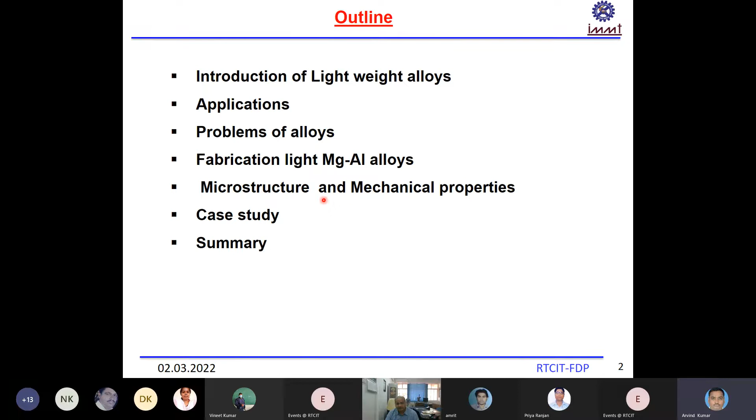So now coming to the introduction part. Because I'm going to talk on light alloys, I'll first introduce what metals are, because an alloy is part of metals. Metals are substances characterized by properties like electrical and thermal conductivity, reflectivity, ductility, and malleability. These are the properties which differentiate metals from non-metals.

Compared to a non-metal, a metal is much stronger, and it is malleable. It has a luster, it has a shine, so you can clearly differentiate metals from non-metals.

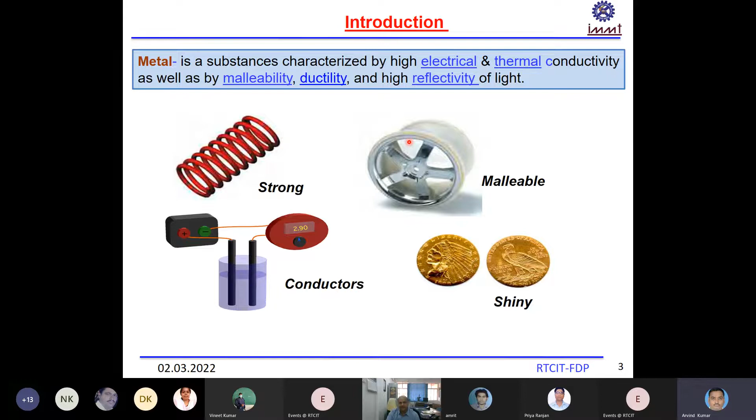And then coming to alloys. An alloy is actually a mixture of two or more elements, and one of those elements should be a metal. Here is an example of copper and zinc. If you see, the copper is replaced by the zinc atoms, so it is forming a solid solution of copper and zinc, and you get this copper-zinc alloy.

And this copper-zinc alloy has a different color depending on the concentration of the zinc. You can vary the colors of the copper-zinc alloys. This is actually called brass, and in Hindi it is called pital. So the color of the brass varies with the composition of the zinc, and the property also varies with this composition, how much percentage of zinc you are adding to the copper.

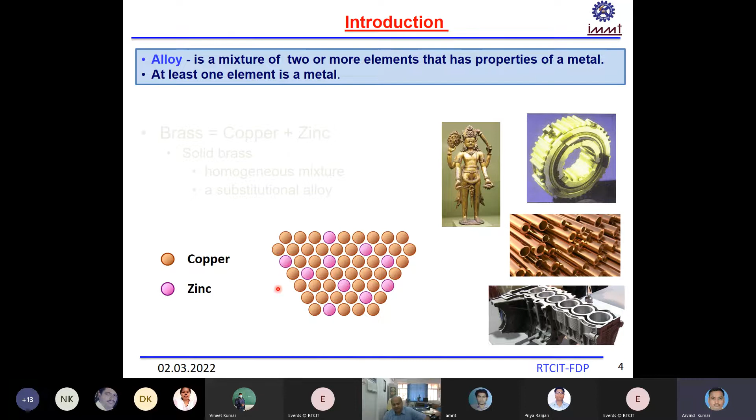So why is it required to make an alloy by adding different elements into another metal? Because for some critical or demanding applications, you cannot get the required property from a single metal. That time you have to think how you can get the required property. So in that sense, alloying is very important, and by alloying, in most cases, you can get the required property.

Suppose you want to make a high strength material with very high design strength for different engineering applications. In that case, with a single metal like iron, copper or zinc, you will not get sufficient strength. So you choose particular elements which can be added in a particular composition, with fabrication methods, processing methods and post-treatment methods, so that you get the final strength as per the design requirement for a particular application.

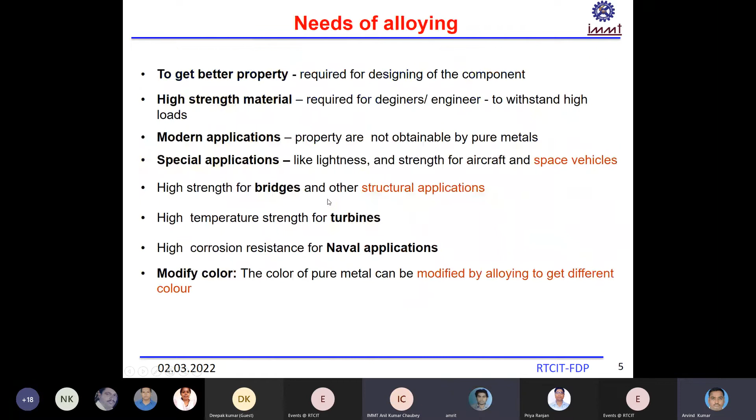Hello. Hello. Yes, sir, you are audible, sir. But is the slide changing? Yes, sir, needs of alloying. The present slide is needs of alloying. Yes, but I'm changing to the next one, but it is not changing. That's why I thought the connection was disturbed. Let me just go to the previous slide. It's also not changing. I think... Now it's changing, sir. Okay. Yes, sir. So now I'm on slide number 6.

This is the role of the alloying element. So what are the roles of alloying elements in getting the required property? If you are adding an alloying element to a pure metal, you can choose it according to your criteria or requirement. And it depends on certain rules like the Hume-Rothery rules, which tell which particular element can be added, what the composition should be, and what the size of the particular metal should be.

So when the atomic sizes are quite similar, one atom is replaced by the other metal atom. In that case, you get a substitutional solid solution, and the lattice position is occupied by the alloying element. Because there is some difference in atomic size, the lattice position is distorted, creating lattice distortion, and that's why the mechanical strength is increased.

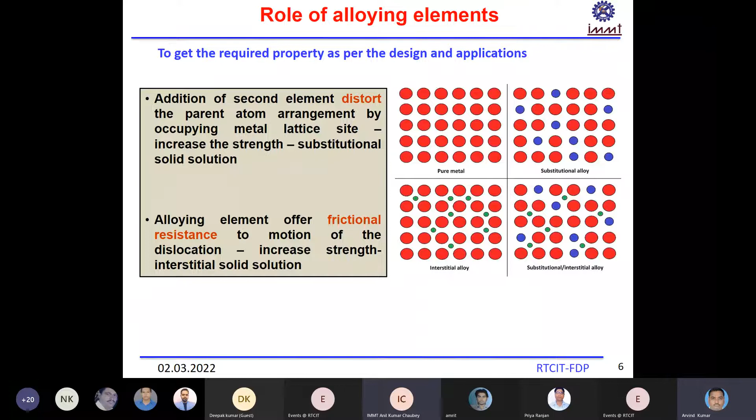So our topic actually is lightweight materials. So why is lightweight required? Because in the case of the automobile, you are decreasing the weight when you are using lightweight material for the construction of the vehicles.

At the same time, in many applications, when your material, utensil or any article is lighter, it looks handy and you can carry it anywhere. And in the case of the automobile, where fuel consumption, safety features and performance are very critical parameters, different reported studies show that when you decrease the weight of the vehicle by around 100 kilograms, for 100 kilometers of running of the vehicle you can reduce the fuel consumption by 0.5 liters.

So in this case, when you are reducing the fuel consumption with effective burning of the fuel, you are increasing the efficiency of the vehicle, and at the same time you are reducing the cost of running the vehicle. So this is very much helpful in the case of the vehicle.

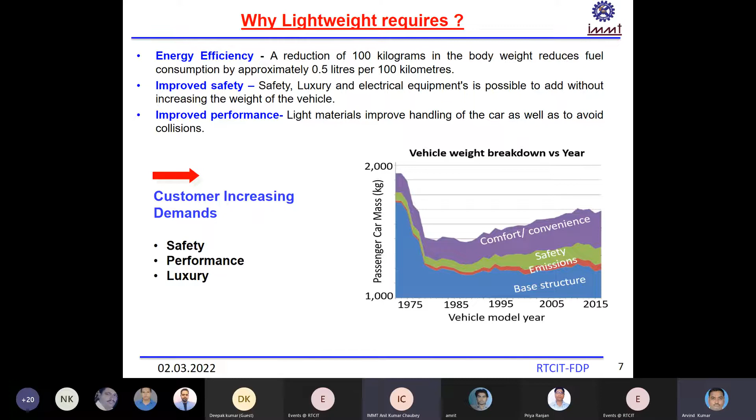And in aerospace, what are the requirements for lightweight? In aerospace, weight is a very critical part, because the aircraft has to fly. So the minimum weight it carries will be good for improving the efficiency of the engine, as well as accommodating extra passenger weight.

So the main requirement is that the components should be very light and very durable, because the aircraft runs at low temperatures, atmospheric temperature, sometimes a little higher temperature, and in different atmospheres, sometimes a marine atmosphere over the sea, sometimes the normal atmosphere. So the material should be very durable and highly corrosion resistant, so that it can sustain all the atmospheres.

And it should have a high tolerance limit and high fatigue resistance, because it is going to be used in continuous operation, and damage tolerance should be very high. Otherwise, the aircraft cannot sustain, and any small fault cannot be tolerated in the case of aerospace material.

So here is a very critical requirement of the property, and at the same time it should also be a cost effective solution, so that many companies can attract and replace it by lightweight material. Balance of the property is also very much required, because for a critical application, all the properties required for aircraft and space applications are very critical. So all the properties should be in balanced form.

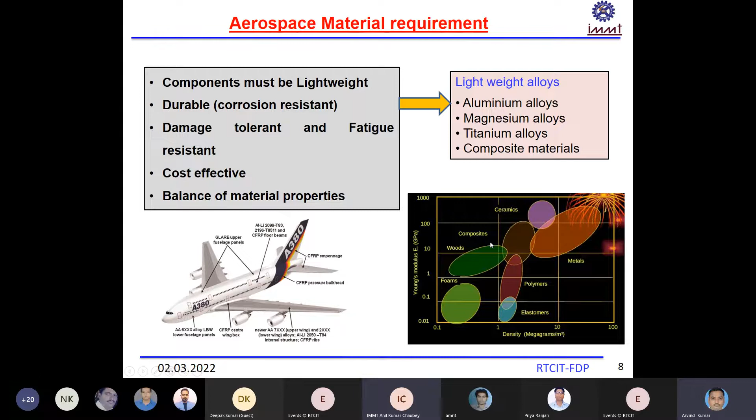And if you are replacing parts with magnesium alloys, since magnesium is lighter than aluminium, it is two-thirds of the weight of aluminium alloys, so you can reduce around 37 to 38% of the weight of the vehicle. Composite materials can replace similar weight as well. So composite and magnesium alloys give almost similar weight performance, because density-wise magnesium is very low, around 1.6, which is comparable to composite materials.

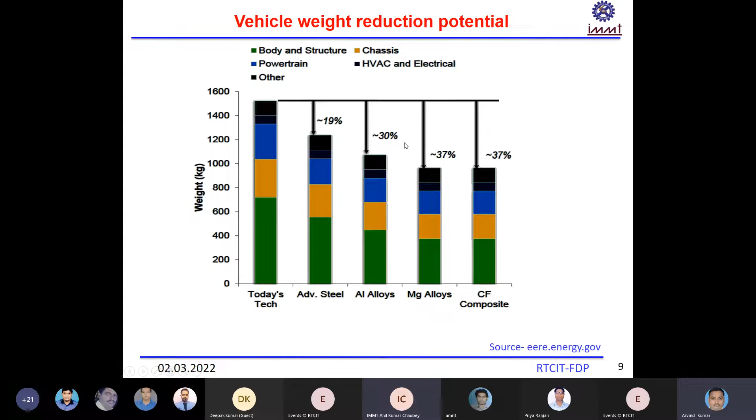Now coming to the general magnesium aluminium alloys, what are the applications of magnesium aluminium alloys in different fields? Because magnesium aluminium has low density and high strength, it gives a high specific strength material, and it is also a good castable alloy. Magnesium is also biocompatible, so it can be used for biomedical applications as well.

Many applications of these alloys are in transport: steering wheels, framework, powertrain, gear housing box, engine block castings, and this is the biomedical application where biomedical implants can be made with magnesium alloys. Also aerospace applications and electronics applications, because of the lightweight of magnesium, many electronics components require being handy as one criteria, so many electronics components were replaced by magnesium alloys.

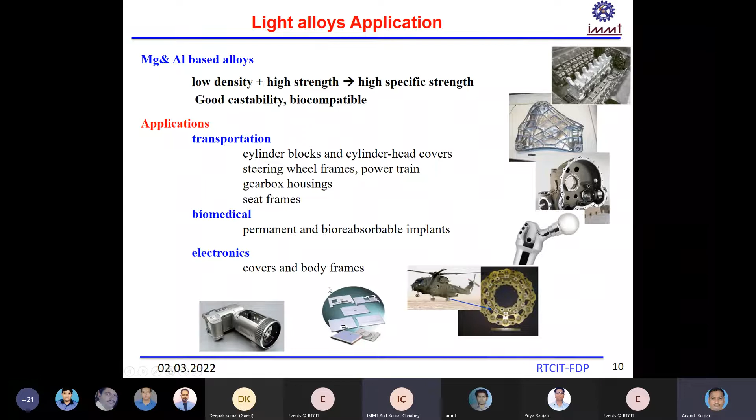Apart from this, these lightweight alloys, aluminium-magnesium based alloys, are used for missiles and other applications like photo engraving, as deoxidizers and desulfurizers, and as anodes since magnesium alloys are highly corrosive. They are also used in sports goods equipment, where large, lightweight components are made from them.

Magnesium is biocompatible, so many bio-implants and implant accessories are made from magnesium-based alloys, such as screws, stents, and nerve guides. Since these are biomedical applications and the material is biocompatible, only the degradation rate of the magnesium alloys needs to be checked. Much research is ongoing in this area of biomedical applications.

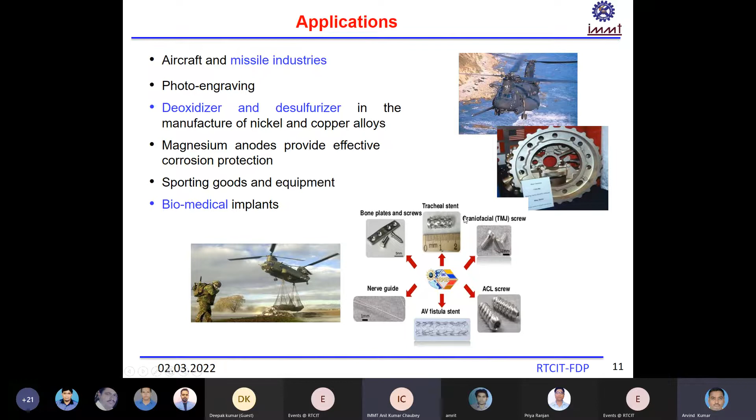Now coming to the different fabrication methods of these alloys. The lightweight alloy is mostly made by the casting process, because casting is economical and large volume production can be achieved by this method.

Many casting methods like sand casting, die casting, and permanent mold casting are used for these lightweight alloys, along with stir casting and bottom pouring. Where your alloys are not completely miscible, you can stir and then use the bottom pouring casting method.

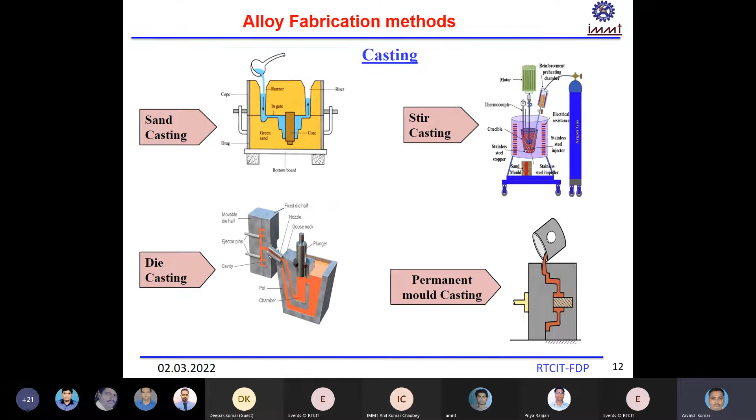Apart from casting, powder metallurgy processes are also used to make alloys, especially for some immiscible alloys and heavy metals which are not completely miscible with each other. That's why many alloys are made by the powder metallurgy method.

In powder metallurgy, you can extend the solid solubility by mechanical alloying, so that a larger volume fraction of the alloying element can be added.

Some processes like spark plasma sintering involve creating a spark between two electrodes, with the material placed between them, to get the sample sintered. Simultaneously, pressure is applied to achieve high densification in the component.

After that, this material can be extruded to remove further porosity.

Other additive manufacturing methods include 3D printing, where you can get a near-net shape by using powder alloys to produce different components through this near-net-shape additive manufacturing process.

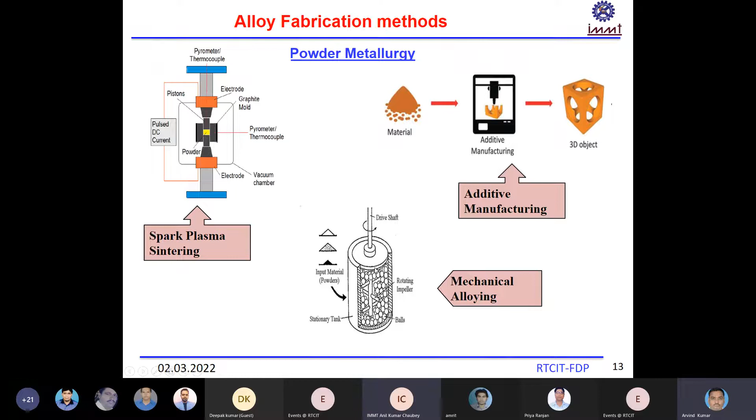Mechanical alloying is also one of the powder metallurgy routes, where different powders are mechanically alloyed. This process can increase the solid solubility limit, and then through sintering or extrusion, the component is made by this mechanical alloying powder metallurgy route.

Now coming to the selection criteria for these alloys. For selecting or making the alloys, the phase diagram is one of the most important tools, where you can determine how much percentage of element A or B can be added to the parent metal.

The phase diagram shows what the phases should be at different percentages, temperatures, and pressures, giving a guideline for making the alloy. It also allows you to control the structure and properties of your alloy, as the phase diagram depends on composition and temperature of the different alloying elements.

Here you can see that A and B are alloyed, and in this range you can see the solidus and liquidus range, with the liquid and solid region in between.

For example, suppose this is a copper-nickel binary alloy. If you add nickel to copper, you get the alpha copper solid solution, and this is the liquidus range. When pure copper is present and you add nickel, the liquidus range shifts to a higher temperature.

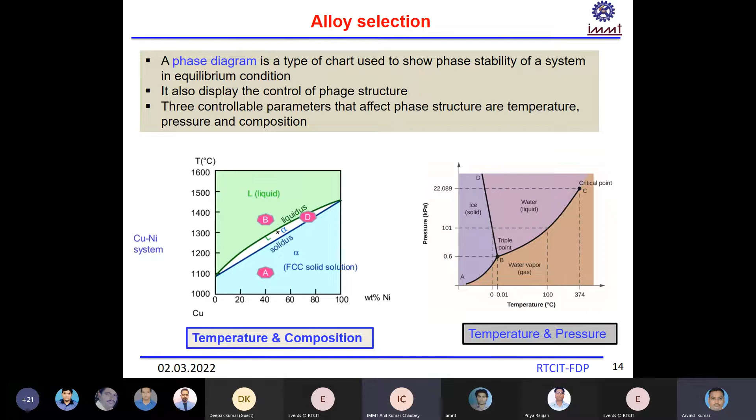This is just a guideline to see what phases you get at what temperature, and at room temperature, how much phase percentage or volume fraction you get after solidification of the alloy.

The lever rule is also one of the tools where you can get the exact volume fraction of the phases, and in certain phases how much of element A or B is present. You can get this using the lever rule.

This is one of the alloy phase diagrams, where A and B are present. A is 100% here and B is 100% there. This is the eutectic point, and suppose if you want to get the composition at this point, this is the W1 composition.

By the W1 composition, you can apply the lever rule, where you draw a line parallel to the x-axis at that point, and drop a line to the x-axis also, so that you can get W0. By applying this lever rule, you can get the particular composition at that particular point and particular phase. So according to your requirement, you can choose how much alloying element can be added to get this volume fraction of the phases at different temperature, and also at room temperature. So this is one guideline for how to make the alloys.

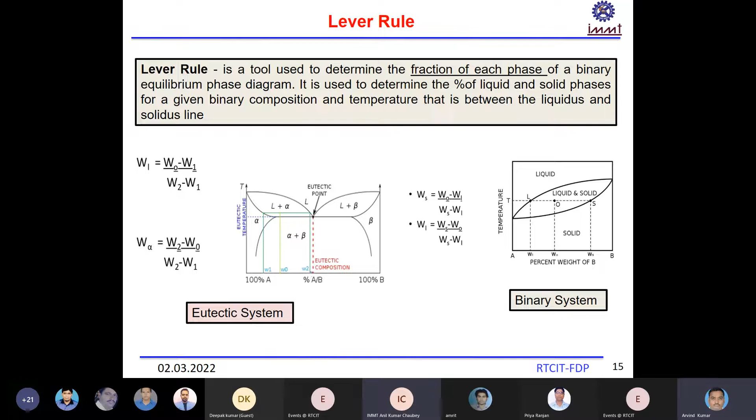In physical metallurgy, many such rules exist, many guidelines which help you find out the designing of the alloy. Here I have given just a small introduction.

So what are the automobile solutions for lightweighting of the vehicle? In lightweighting, first you have to choose a lightweight alloy, so that you can replace the components by using the lightweight alloy. Then you have to see the design parameters of the component, and how you can modify the design for lightweight components. Then you also have to see what technologies are available, and how you can modify the technology to get this design for lightweight casting or using lightweight material. So sometimes you have to see the design and also the different fabrication parameters, and then what technologies are available for fabrication of these lightweight alloys.

So all these you have to see for different cases, if you are choosing aluminum alloys or magnesium alloys. You have to see first how you are going to make the alloy, and then if a certain design parameter is there, how you are going to get that design of the component, and then what technology you have to choose, so that you can get a particular design without any defects or compromising the property of the material. So these parameters you have to see for designing different alloys.

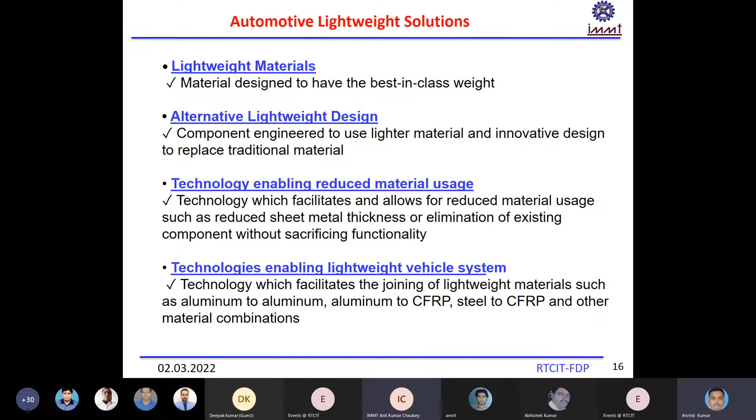So after that, I'm coming to the case study part. In the case study, I'm going to give a case study of the magnesium aluminum lightweight alloy. First I'm going to give a synthesis and this alloy fabrication process by the powder metallurgy route, and then I will explain why powder metallurgy was used in this process, and how we can overcome the disadvantages of liquid metallurgy by using this powder metallurgy route, and what are the limitations of the powder metallurgy route. Then I will also show another case study of this same alloy fabrication by the casting route.

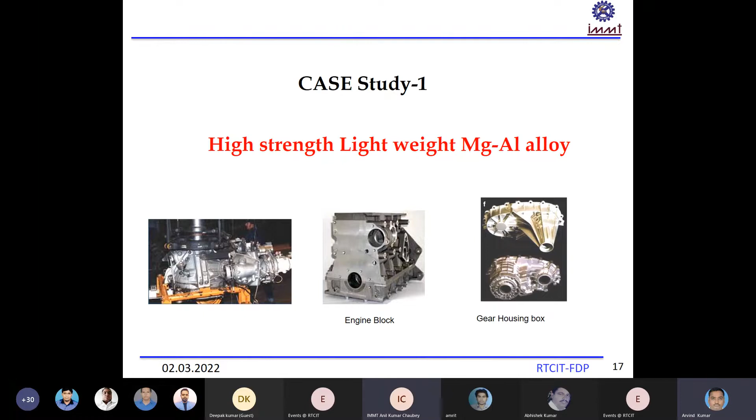So first I'm going to give this powder metallurgy route. So what are actually the problems in magnesium aluminum alloys? Because if you look at the phase diagram of magnesium aluminum, the solid solubility of aluminum in magnesium is less than 1% at room temperature.

So what happens is, when you go to a certain melting temperature and add aluminum to magnesium, and then solidify down to room temperature, you come to a two-phase region, with the alpha and gamma phases. Gamma is actually the magnesium-17-aluminum phase, which is a brittle phase. This phase has a semi-coherent BCC cubic structure, which is incoherent with the magnesium matrix, which has an HCP structure.

But anyhow, you are getting this phase, so we have to avoid this phase and minimize it. Otherwise, our material will become completely brittle, and the interface between magnesium and this gamma phase is also very fragile. That's why, when used in real conditions, many cracks form when the gamma phase is much more present in this alloy. So our aim is actually to reduce this gamma phase in magnesium aluminum.

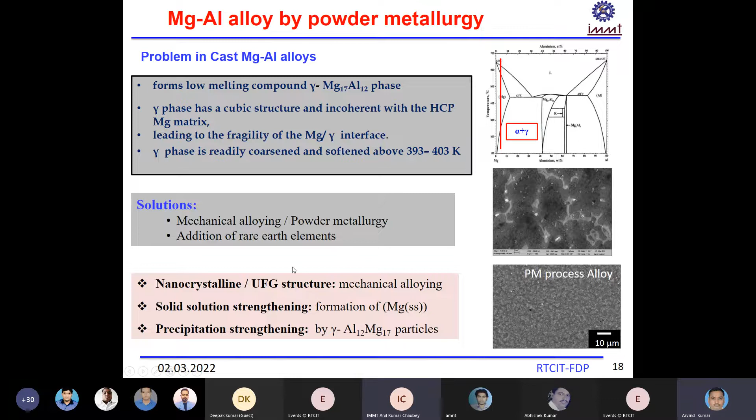So I'm going to tell you how this alloy was prepared. We have added 7.4% aluminum in magnesium, and by the powder metallurgy route we did mechanical alloying by planetary ball mill, and then this powder was hot pressed and then hot extruded. After the pressing, you get this tablet form, and this tablet was used for extrusion, and you get the rod form, and then the final property of this alloy was evaluated.

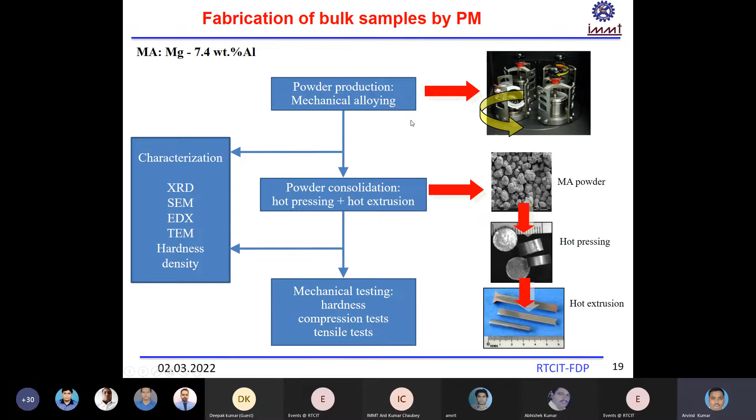So these are the parameters used. This is the hot press, and this is the die where the powder was filled, and then it is heated and pressed, and after that you get the pellet, this cylindrical tablet, and then this was extruded at 400 degrees temperature. The 10 mm diameter was reduced to 4 mm diameter after the extrusion, so that you get a very highly dense final component.

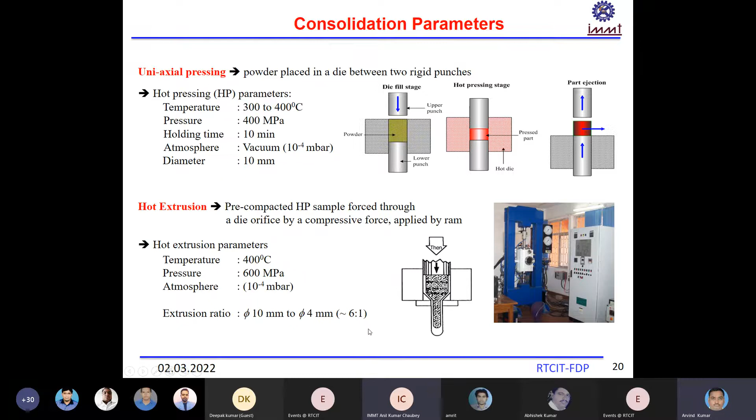So what we have done is extend the solid solubility of aluminium in magnesium, so that you can reduce the gamma phase formation. This mechanical alloying was done for 5 hours, 20 or 40. We have gone to 100 hours, and we see that there is still a small gamma phase here, and then it was again done with 3 hours of cryomilling to make the particle size very small.

But in this process there is a lot of handling. The handling was mostly done in the glove box, but during the processing of the extrusion or compaction there is some contact with the atmosphere, and magnesium is highly oxidizable. Some oxidation is taking place, but these oxides are also very fine and distributed throughout the matrix.

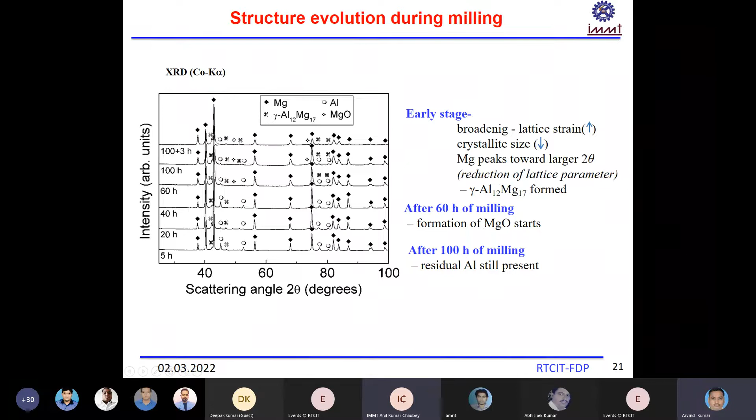Here you can see the small gamma phase and the solid solubility, because the aluminium peaks are broadening, so aluminium is going inside the magnesium. And I'm showing here how the particle size reduction takes place during the mechanical alloying. Initially, because it is a ductile material, the particle size increases, and further on fracturing becomes dominant compared to cold welding.

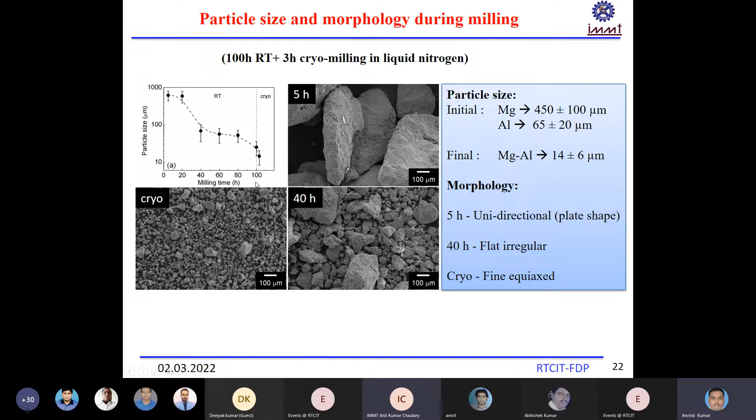Why? Because it is a very ductile material. That's why cryomilling is required to get very fine particles in the case of magnesium aluminum alloys. Here I am going to show you the elemental distribution during the mechanical alloying.

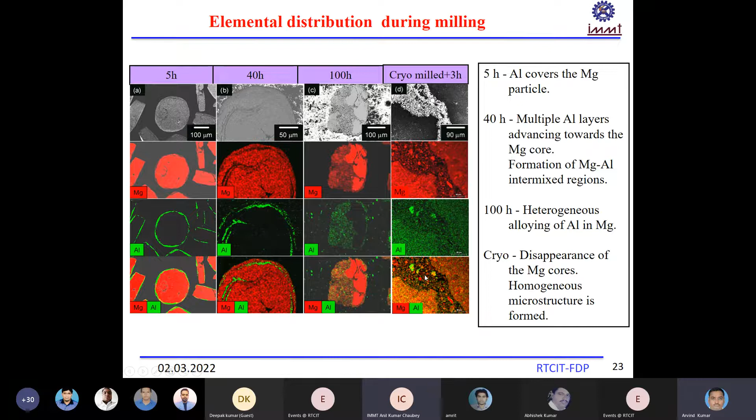So here by mechanical alloying, we were able to get more and more aluminium in solid solution, as well as reducing the size of the gamma phase, as well as distributing it throughout the matrix. So our aim was that the gamma phase should not solidify along the grain boundary, and also to reduce the gamma phase. So by this powder metallurgy, this objective was achieved.

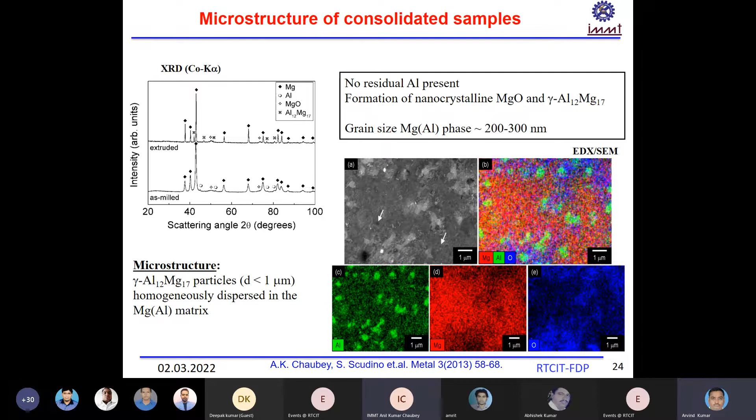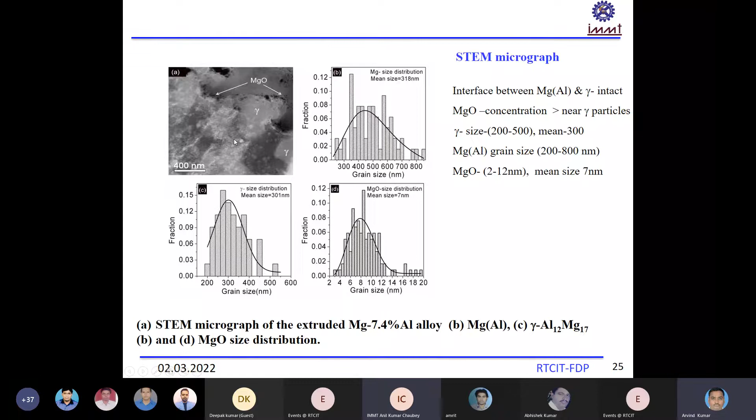In the next slide, this is the STEM microstructure, where you can see a little bit of magnesium oxide, which is very fine, 5 to 7 nanometers, and distributed mostly along the particle interface. And the interface with the gamma phase is also very good. There are no gaps or cracks at the interface. So it shows that this gamma phase forms throughout the matrix, but the interface is also very good.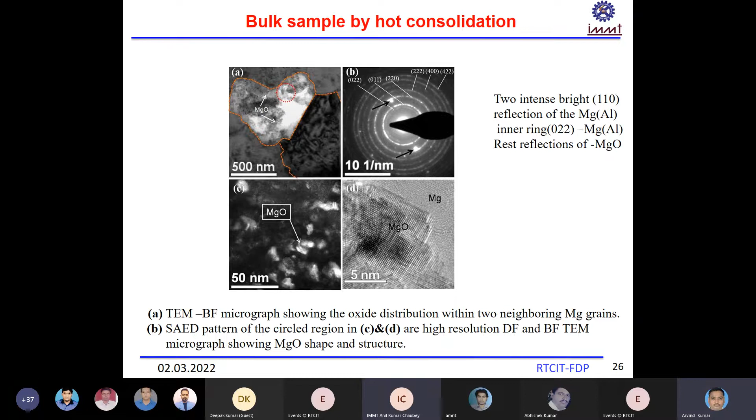This is the MgO distribution. This is the magnesium distribution, and the interface also you can see, and it is a very small size of magnesium oxide. So this is not doing any harm, it's only strengthening the matrix in this case.

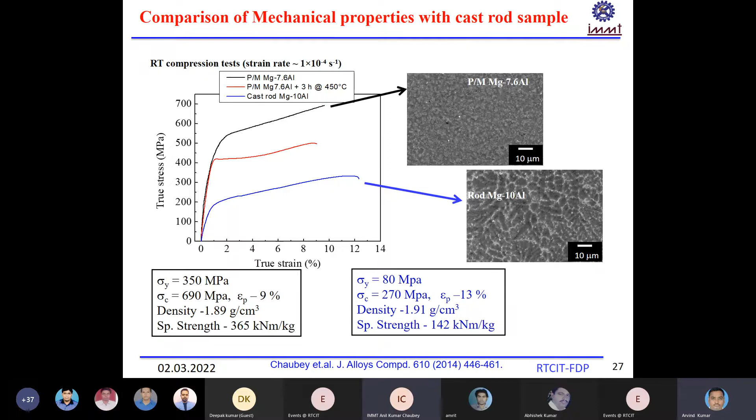And after heat treatment, the mechanical property does not go drastically down. It is around 450 megapascal, still more than twice that of the cast structure. So this shows that if you make this magnesium aluminum alloy by the powder metallurgy method, you can achieve your objective of higher strength without losing ductility.

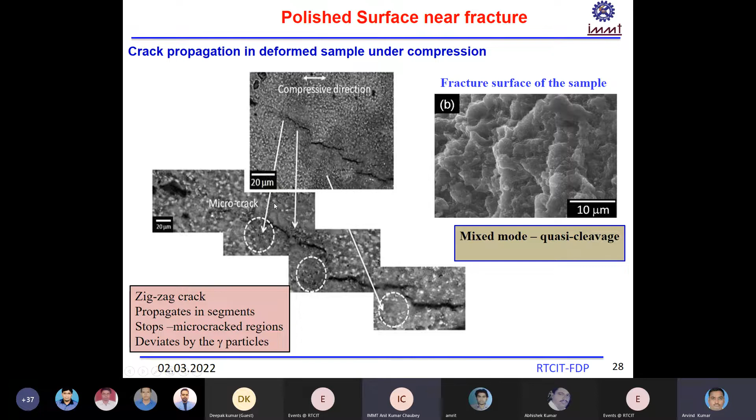So now coming to magnesium case study 2, where we are going to form this magnesium aluminum alloy by casting method. With the powder metallurgy method we are in fact getting higher strength, but making a bigger component and cost economy are other factors. The powder metallurgy method has a limitation in making a component, and cost-wise it is also higher compared to the casting alloys.

So that's why we have to look at another method where we can get the same objective, to reduce the gamma phase and increase the solid solubility or strengthening in the alloys. So we have tried the casting method also.

Hello, Dr. Arvind? Yes, sir. Okay, I thought there was no response, whether we are in connection or out of connection. No, sir, we are listening. Okay, if there is any question, you can ask in between or after the presentation. If you have any query, you can stop me and I can give an explanation. Dear participants, if you have any question or doubts, please put them in between; sir has given permission. Sir, please continue. Okay, thank you.

So I'm going to present this magnesium aluminum alloy production, which is mostly used in automobile and aerospace components, by casting method. Here we first tried magnesium and aluminum. We used the magnesium 5 aluminum alloy and then added some zinc, and then added calcium also to see the possibility of reducing the gamma phase in this alloy. And we produced this by stir casting method.

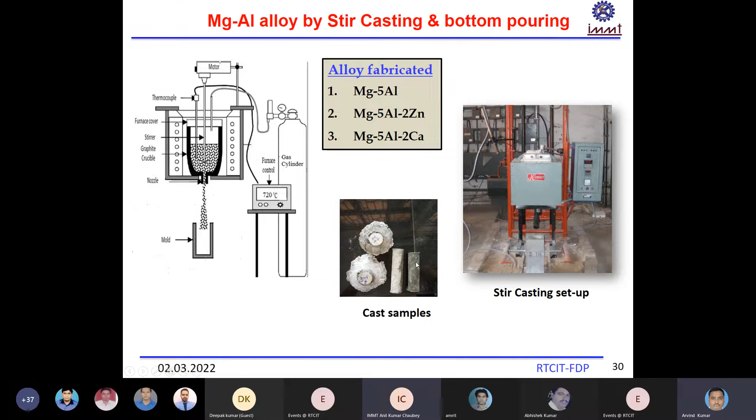So all these three alloys have been made by the same stir casting method, sir? Yes, all these three alloys are made by the same stir casting method. On the right side we are seeing the stir casting setup. This is the actual furnace, and this is the schematic diagram. Yes, I have worked in this. And this is the cast alloy you can see, and after casting, the samples.

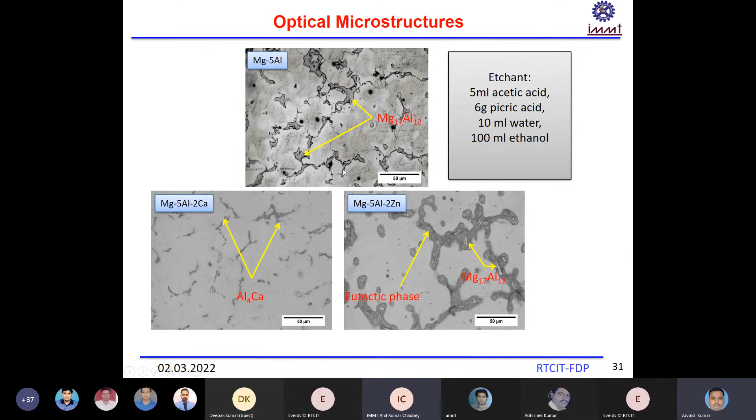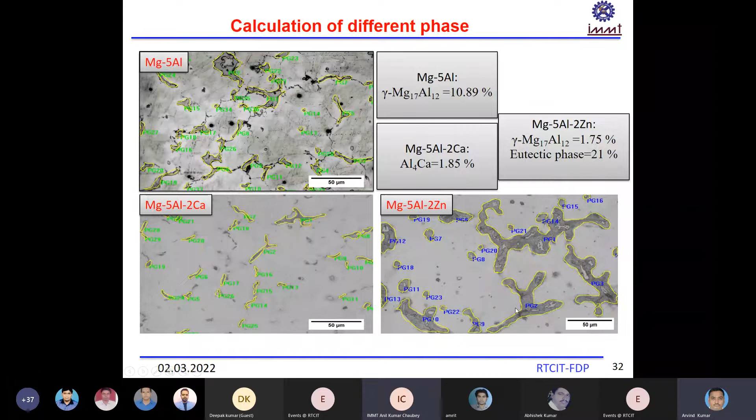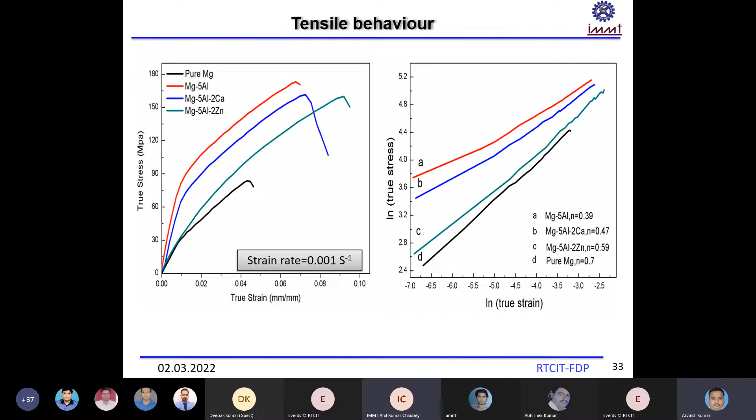For pure magnesium, you are seeing a mix of ductile and brittle type of fracture. But as you add more aluminum, it goes more brittle; this is the intermetallic phase region where it becomes completely brittle, and that's why it fails at a very low ductility. When we add calcium, it is more brittle, and you are not solving any problem.

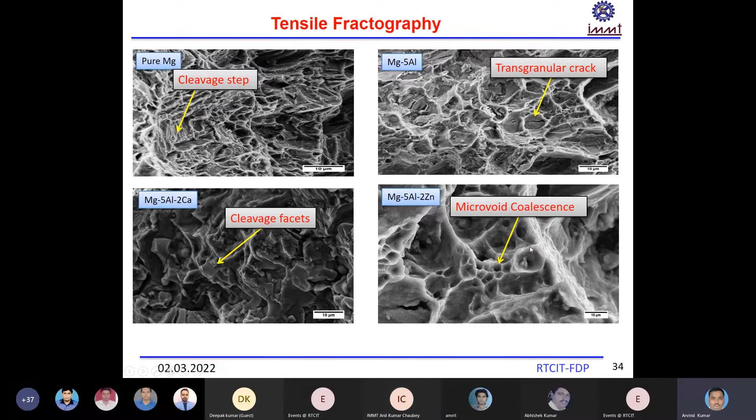But in the case of zinc, the ductile region is increasing, and still there is some brittle region, so it is a mix of ductile and brittle. That's why you get moderate strength and moderate ductility. Our purpose was to reduce the gamma phase and increase the strength, but we could not increase the strength. We can only use zinc to make an alloy with moderate strength and moderate ductility.

Sir, I have one question on the previous one. These three alloys, magnesium aluminum, magnesium aluminum zinc, and magnesium aluminum calcium, these findings were for the primary process? No secondary process like rolling or forging was done? No secondary processing was done, because when the material is brittle, if you go for rolling or forging, the sample will crack and the component cannot sustain. Many cracks will form, so we have not gone for secondary processing.

But in case of magnesium aluminum zinc, secondary processing can be done; that was not done in this case. So by doing that, can we expect any further improvement in the property? Yes, that can be expected in the case of magnesium aluminum zinc. I will show you the effect of forging in later slides. But here our aim was to increase the strength.

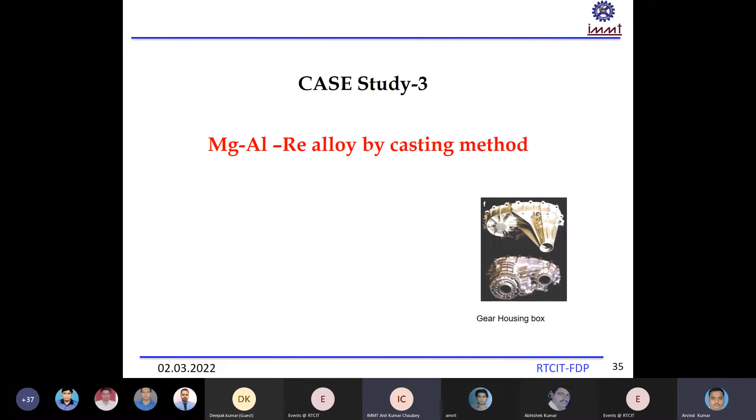But the rare earth element is a very small percentage. Rare earth elements increase the cost of this alloy, but we are using 0.1, 0.2, 0.3 percent, so it does not actually increase the cost much. So here you can see the effect of the rare earth.

Actually, this rare earth element increases nucleation, and that's why it reduces the grain size, and grain refinement takes place during solidification. When the grain is refined, obviously your mechanical strength will be increased, and it also improves your metal quality,

and reduces the impurity level. And the intermetallic which is forming is stable at high temperature. That's why the creep strength of this alloy is also increased, and rare earth also improves the corrosion resistance. So rare earth has a very good effect in magnesium aluminum alloys.

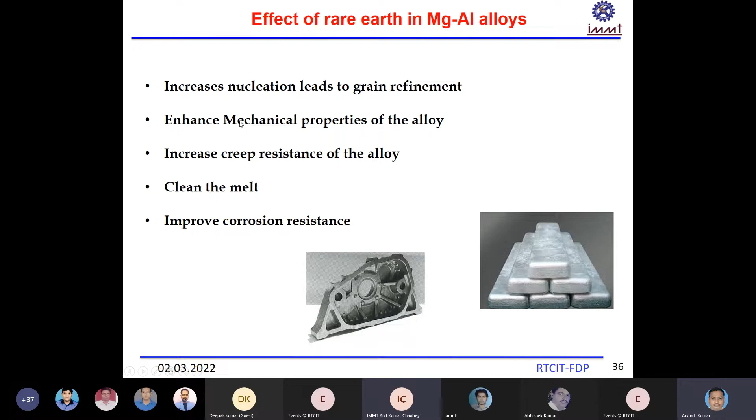So actually, the main problem was the gamma phase compound in magnesium aluminum alloys, and this gamma phase coarsens when you are heating the alloy in the range of 393 to 403 K, and further your property deteriorates. And this gamma phase, which is intermetallic with a cubic structure, is not compatible with the magnesium HCP structure, and the interface becomes fragile.

So to solve these problems, rare earth elements are more reactive to aluminium compared to magnesium. So in magnesium aluminum rare earth, it first forms the intermetallic compound Al11RE3, which is incoherent with the HCP matrix, and its melting point is also high, so it cannot melt during operation at 300 to 400 degrees. That's why it also increases the creep resistance of this alloy.

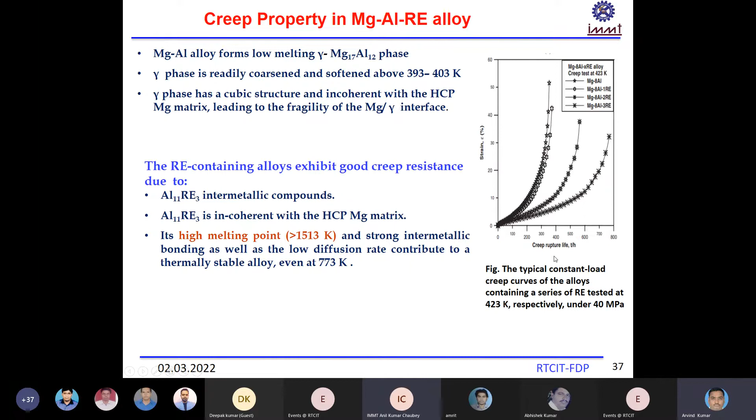How we made this alloy: in this schematic diagram you can see magnesium cerium was added, cerium 1%, 3%, and 5%, to see the effect of cerium. We first took the magnesium cerium master alloy, remelted it and homogenized it for making this master alloy.

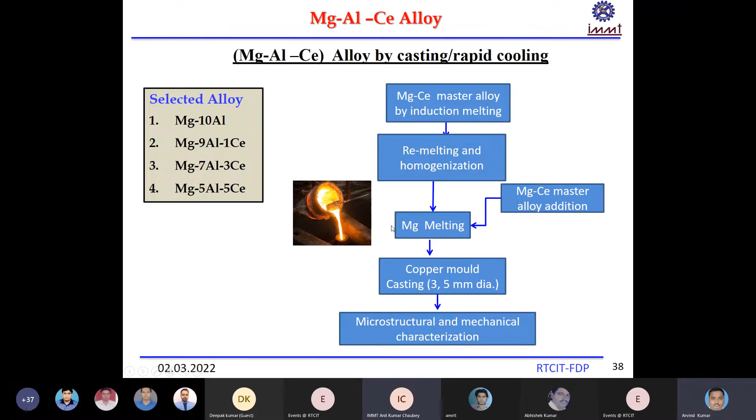Then the magnesium melt was taken, and the master alloy was added according to the composition requirement. Then it was cooled in a copper mold casting, which gives a very high cooling rate so that the grain size is very low. And then we studied the microstructure and mechanical properties of this alloy.

So here you can see the microstructure and the X-ray diagram. In XRD you can see how the different phases are forming: the Mg17Al12 gamma phase, which is there in magnesium aluminum alloys, is reduced at 1%, but at 3% it is completely gone, and at 5% you can see another intermetallic.

At 3% there was an Al2Ce phase, and at 5% Al2Ce and Mg17Ce2 phases are forming. So if you go to a higher cerium percentage, another phase forms, Mg12Ce, Mg17Ce2.

In the microstructure also you can see the magnesium aluminum matrix phase. This bigger polygonal type structure is the Al2Ce phase, and this flaky phase is actually the Mg17Ce2 phase. It is wrongly mentioned here.

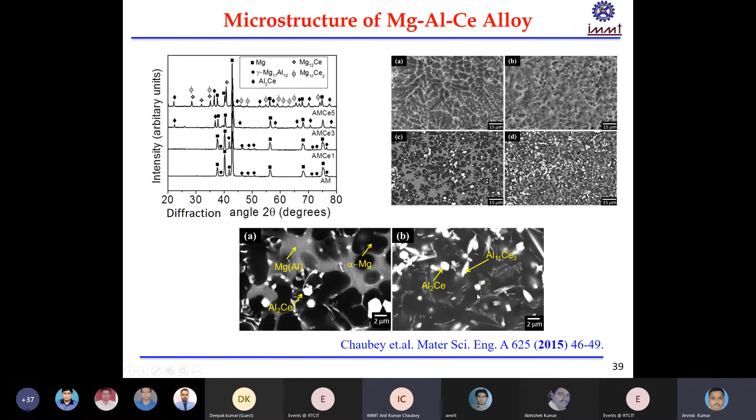So in case of the high percentage of the cerium, you can see the phases distribution in this image, and after that here you can see the mechanical property.

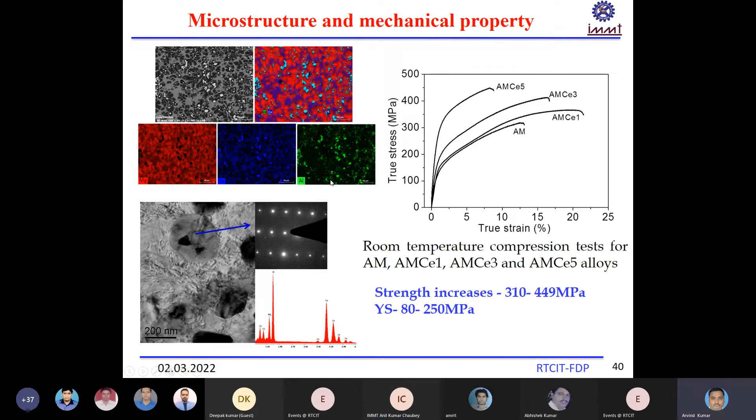So after that, apart from cerium, we have also added neodymium percentage in this magnesium aluminium alloy. A similar method was used here. We first prepared the master alloy, and in the master alloy we added magnesium by melting. We used the stir casting method, and then got the magnesium alloy ingot with neodymium.

Here also you can get different phases, as the rare earth elements are almost similar in nature in different aluminium and magnesium alloys. You can see this is 1Nd. Here it was magnesium 4 aluminium, where this phase was refined.

You can see this gamma phase which is along the grain boundary, but here it is refined, and some are formed within the grains.

But if you increase the neodymium percent to 4%, you can see another intermetallic forming, like a branch structure, polygonal type triangular structures. You can see how it is homogeneously distributed in this magnesium aluminium matrix, and the XRD also shows this phase.

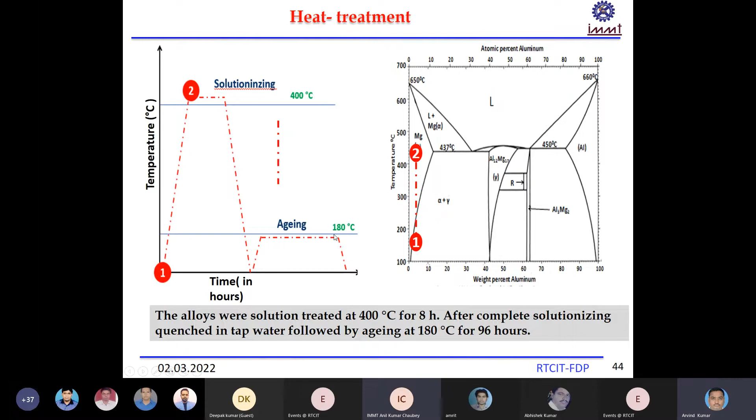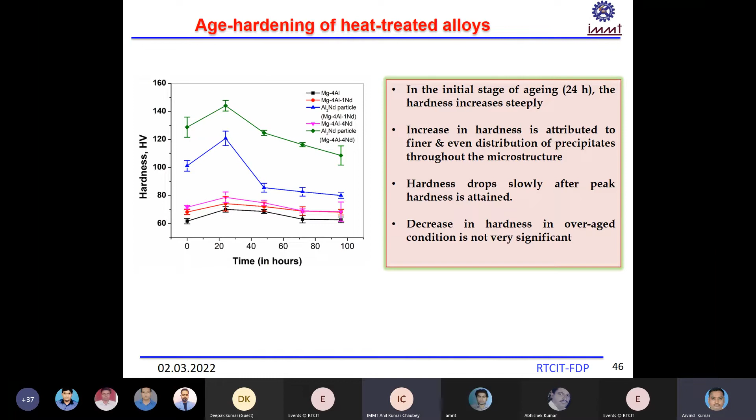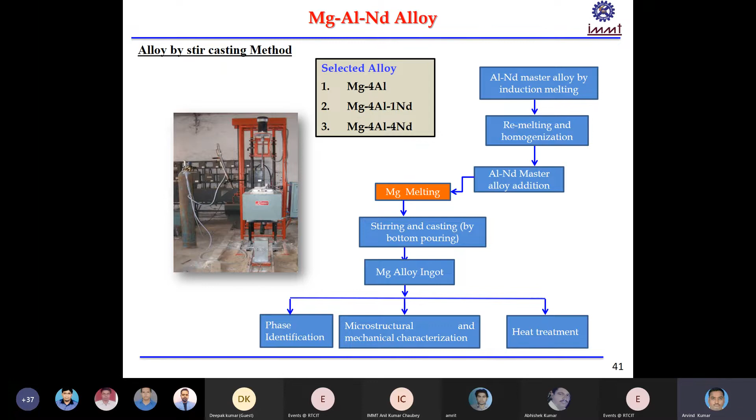Actually, before this, sir, sorry to interrupt you. In the previous slide we discussed about the optimum aging time. Can you tell us the optimum percentage of mixing of this aluminum and neodymium which will give the better optimum result? You are telling about this aluminium - here we have added 1% and 4%. So which one is optimum, sir? If this aluminum alloy we have to use, or in between, we have to search further for a better one.

Actually, here we have prepared this alloy for HAL Koraput. Their main requirement was for a gear housing box. They were mostly interested in improving the creep resistance of this alloy. Creep resistance depends on the intermetallics and how stable they are at high temperature. In this case, at 1% of Nd, we didn't get a high volume fraction of intermetallics. We got some gamma phase and some intermetallics, but the volume fraction was very low, and the shape was pointed, so the creep resistance was not increased.

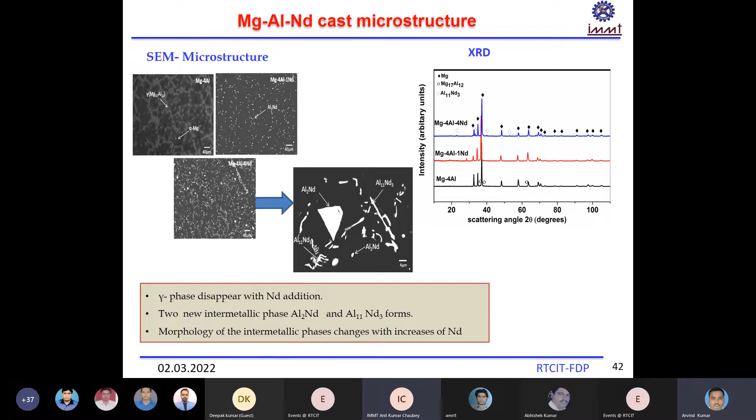So we went from 1 to 4%, and at 4% it was found to be very good. In between, we studied it for creep resistance, which kept increasing, but between 3 to 4% we found better creep resistance. The data is not shown here, but around 3% to 4% we found better creep resistance because of more intermetallics and their branching, which gives this alloy high thermal resistance and improves the thermal property. These intermetallics are stable between 300 to 400 degree temperature, which was the requirement. So we did not focus on the strength part of this alloy, but on the creep resistance part.

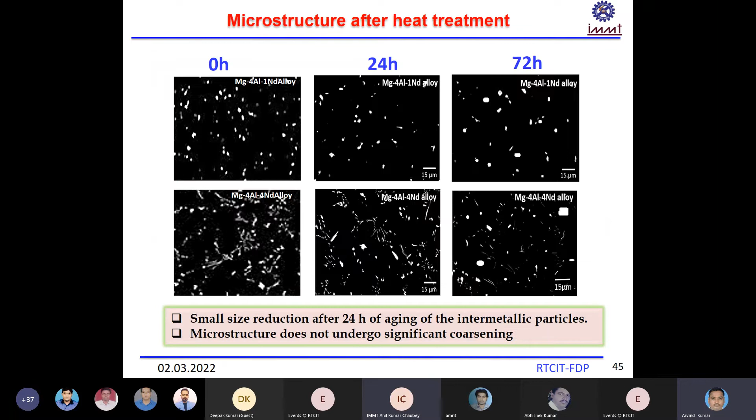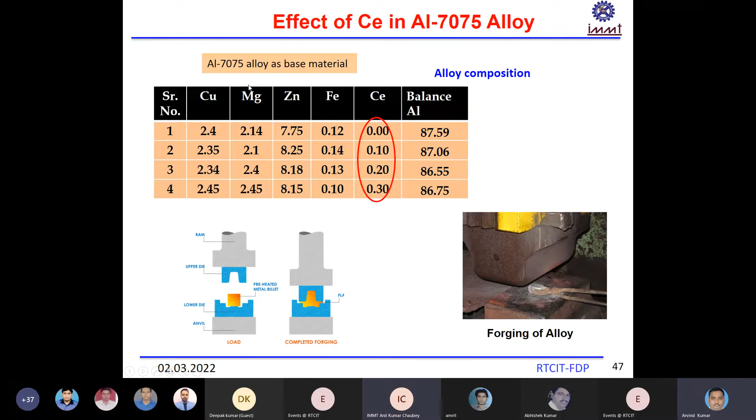This alloy was also made by a similar method. We prepared the aluminium cerium master alloy, which was then added into the aluminium melt and homogenized. Then we did casting and hot forging of the cast samples, followed by solutionizing, aging, and finally the microstructure and mechanical properties were studied.

We did the melting at around 780 degree temperature, cast the alloy, and homogenized for 54 hours. For forging, we heated the sample to 400 degree temperature, and forging continued down to 250 degree temperature - so in this range of 400 to 250 degrees, open die forging was done. You can see here the press and the samples being forged, and finally after forging you get this shape.

Then solutionizing was done at 470 degree for 2 hours, followed by aging. We did double aging: 107 degree temperature for 6 hours, then 177 degree for 6 hours, then air cooled.

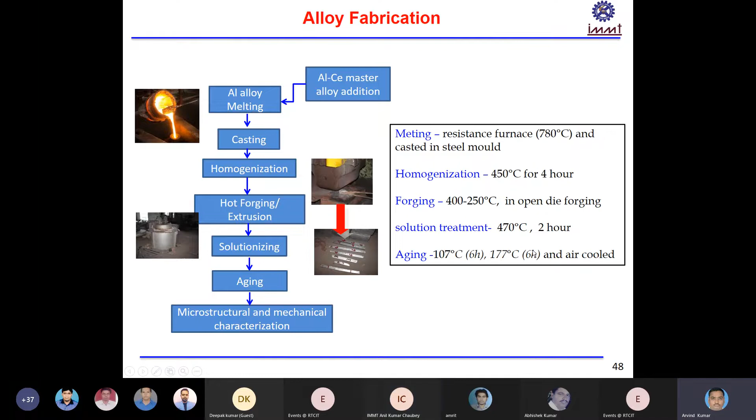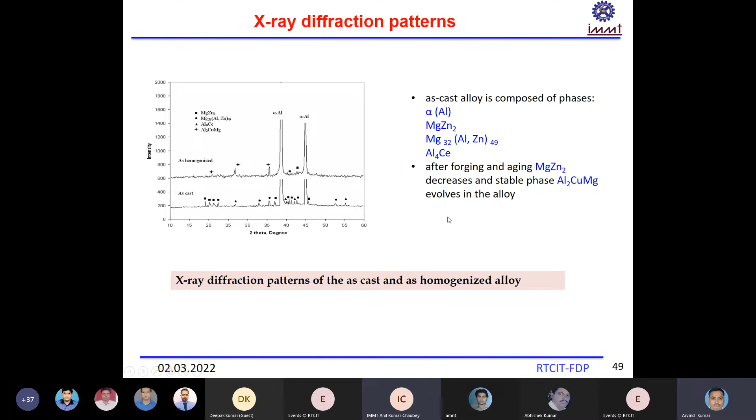Here you can see the microstructure. This is the Al2CuMg phase, and then Al7Cu2Fe, and this is Mg32(AlZn)49 - this is a eutectic type phase and mixed complex phase. This MgZn2 and alpha aluminum - these are the phases mostly forming in this alloy.

So here you can see this is the microstructure where we are increasing cerium from 0.1 to 0.3%. This is 0, 0.1, 0.2, 0.3%, and the alpha matrix was surrounded by the intermetallic secondary phases. With cerium addition, you can see these continuous phases are broken, and a granular type of alpha dendrites are forming.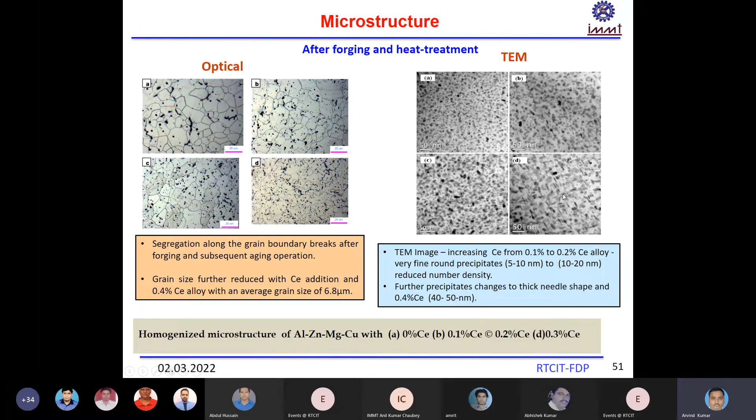And for mechanical properties, we are getting strength around 560 to 550 megapascals, which is quite good for this 7075 alloy.

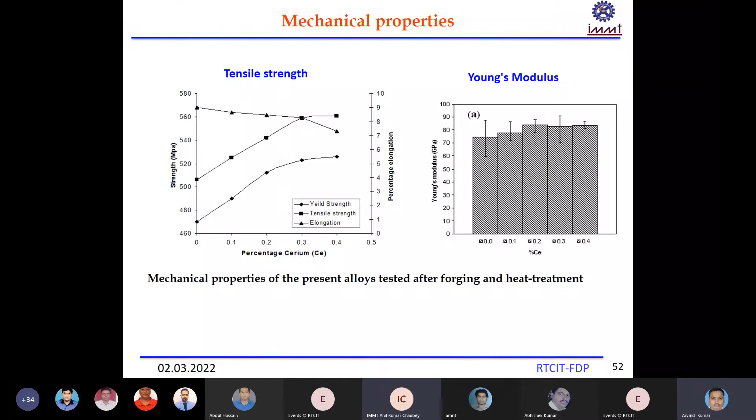And this cerium percentage, a rare earth element in this alloy - rare earth elements not only improve the mechanical property of this alloy but also improve the creep resistance of this alloy, so these alloys can be used for different high temperature applications as well.

And this case study shows that this alloy can be designed as per the requirement of the component or the application-oriented requirement. So these alloys can be modified, and the processing can also be checked or changed according to your requirement.

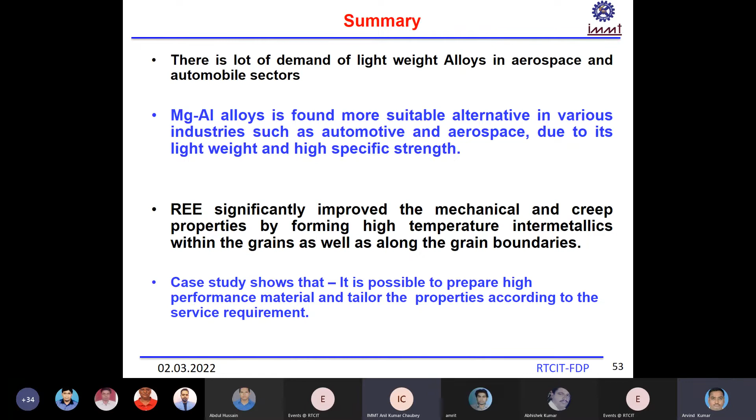Thank you, sir. Anybody from the participants want to ask a question? Sir has given a very wonderful lecture on lightweight alloys. I think many of us are working on aluminum alloys and composites. So any kind of doubt if you have - I have seen Mr. Bhubaneswar Prasad, faculty from RTCIT. I think he is working on aluminum 7075. Mr. Bhubaneswar Prasad, if you have any doubt on aluminum alloy 7075, since you are working in this alloy - Bhubaneswar? There is someone who has raised their hand, so either you can go by.